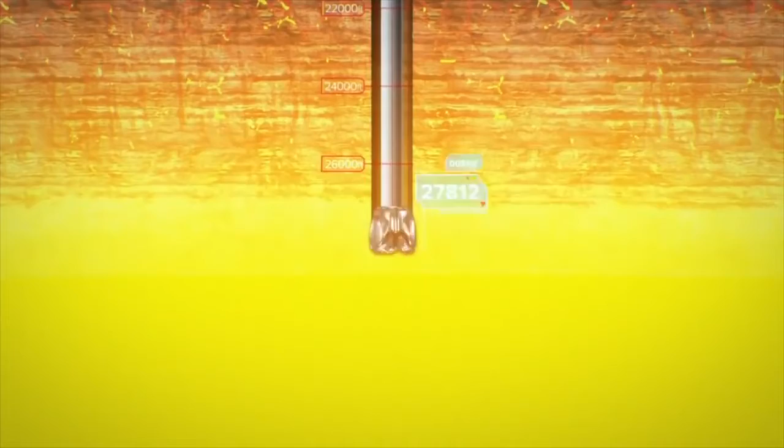So our first question was, where's the energy? And there's only one answer, and that's right here. A few miles underneath us is unlimited power, unlimited energy. The deeper you go, the hotter it gets. You take that energy and bring it up. Is there a way to bring up just the energy? What it takes is doing the right things and inventing the right things.

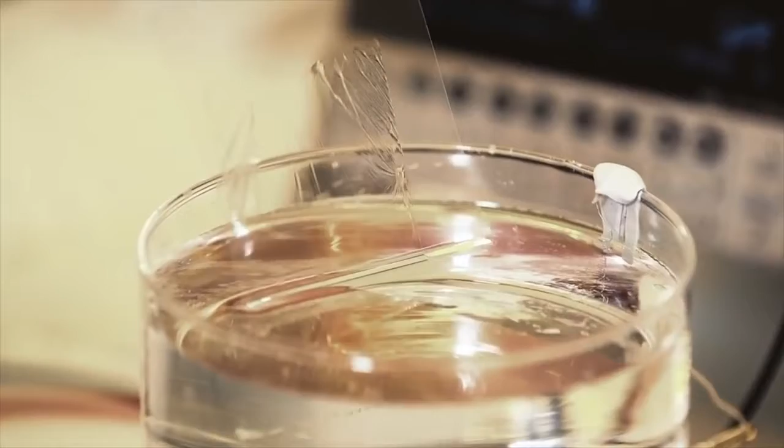You can't use copper wire because it'll melt. So we found this material called graphene. Graphene is a substance made out of graphite, which is like pencil lead. What they discovered was that if they take one molecule layer at a time off this graphite, that's called graphene.

It's 100 times better conductor than copper. It's lighter than air, stronger than steel. It transfers heat really efficiently. If you put 100 degrees here, you get 100 on the other side instantly. In the middle, it's completely cool. So the heat that you put in gets all the way there.

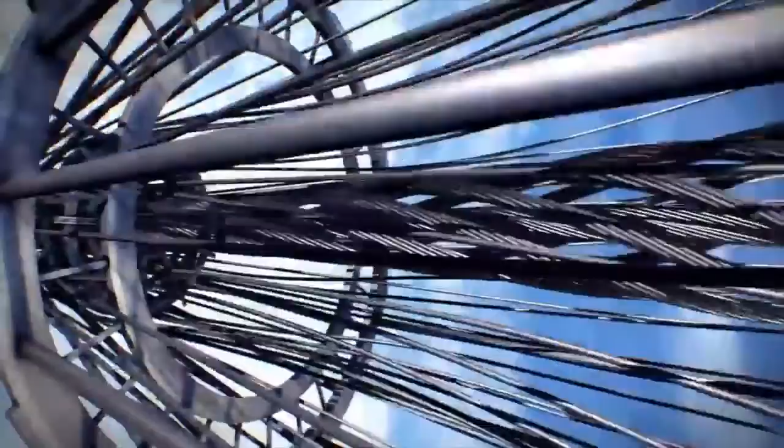Whether you go 10 feet or miles, you could bring up unlimited energy from deep underground to the surface, pollution-free. So I approached the graphene guys and said, could you make me a string? If you make me a string, I'll put those strings together and make a cable. Then I'll put the cable underneath the ground, and that cable will bring up the heat.

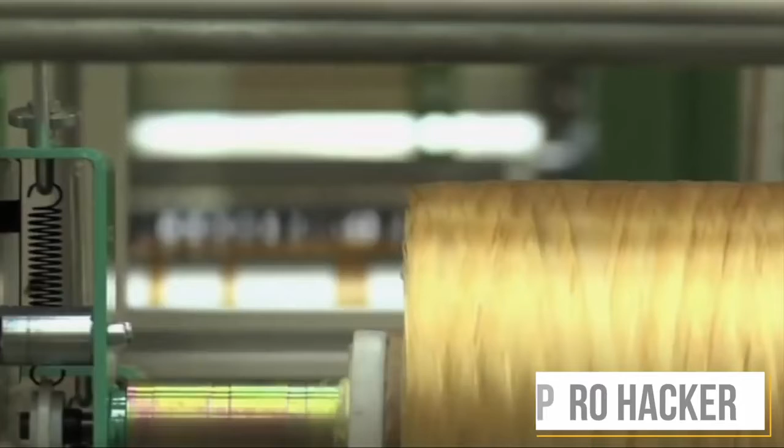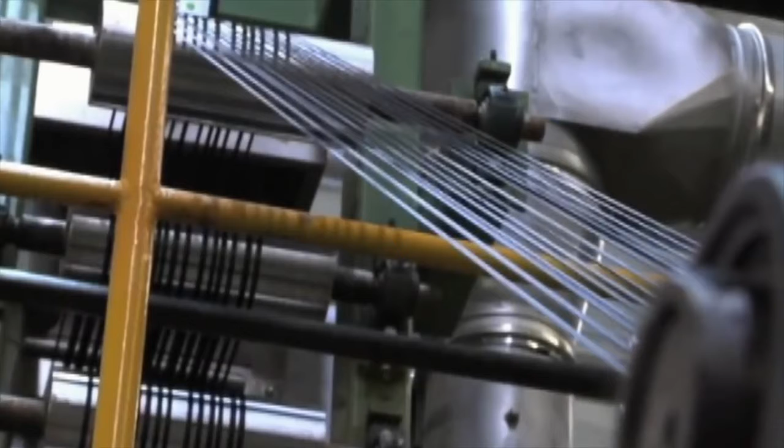At first they were a little wary because it seemed too simple. They have already made the first set of ropes for us, the short ones. They've tested it and found it to work perfectly fine. We are using that and working with Stage 2 in Michigan. Stage 2 has a platform we are building where we'll test everything out, and then that product will be commercially manufactured and propagated from Singapore.

This would be the greatest invention maybe ever, because if you can get unlimited energy from underneath the earth, pollution-free, that's everything. You have no pollution, no fossil fuel issues, no CO2 coming out, no greenhouse gases. All of that is gone. Here's the answer.

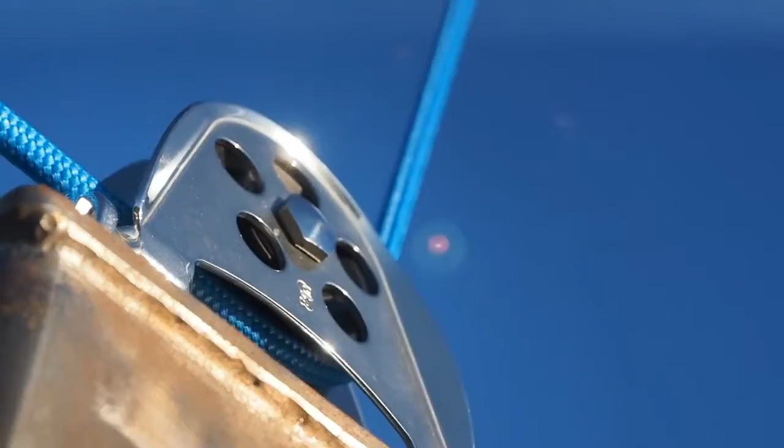The world demands cleaner, low-cost alternatives to fossil fuels. Altaeros Energies is answering that call with a high-altitude wind turbine, the BAT. For the first time, affordable wind energy can be delivered to the furthest points of the Earth, powering remote communities, off-grid industries, and disaster relief.

The Altaeros BAT harnesses stronger, more consistent winds found at higher altitudes. At these heights, it produces twice the energy of an ordinary wind turbine. The reason high-altitude wind is so exciting and worth going after is really very simple: there's just a lot more of it. Winds 1,000 to 2,000 feet above the ground are on average 5 to 8 times as powerful as what you get nearer to the ground.

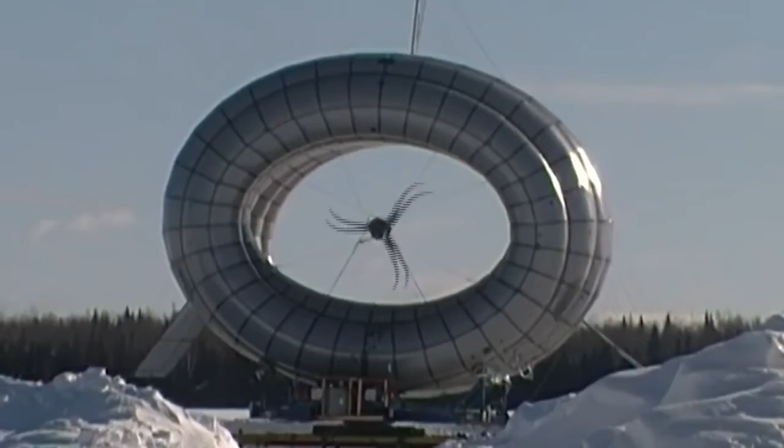Reimagining proven aerospace technology, the BAT uses an inflatable helium shell to lift a lightweight turbine into the air. Power is sent to the ground using high-strength conductive tethers. The BAT also offers a unique platform to expand internet and phone services, weather monitoring, and much more. Designed to be rapidly deployed anywhere, the BAT significantly reduces human and wildlife impact compared to ordinary wind turbines.

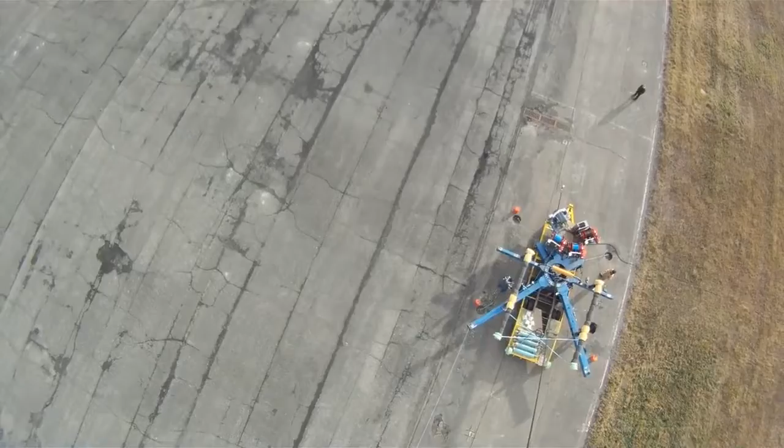I think Altaeros and the BAT is really exciting because it goes beyond the incremental improvements we've seen in wind, and offers a breakthrough way to bring wind power to millions of new customers around the world. Formed out of MIT, Altaeros is working with the Alaska Energy Authority to launch the first commercial high-altitude wind turbine. Less expensive, more flexible, and significantly more efficient, the BAT is the next generation of wind power.

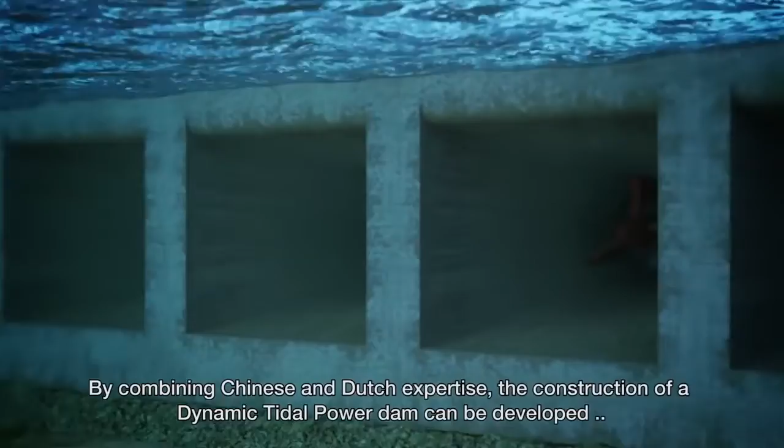In September 2012, representatives of the Chinese and Dutch governments signed an agreement to continue investing in the implementation of dynamic tidal power in China. By combining Chinese and Dutch expertise, the construction of a dynamic tidal power dam can be developed into an economically viable and environmentally sustainable investment.

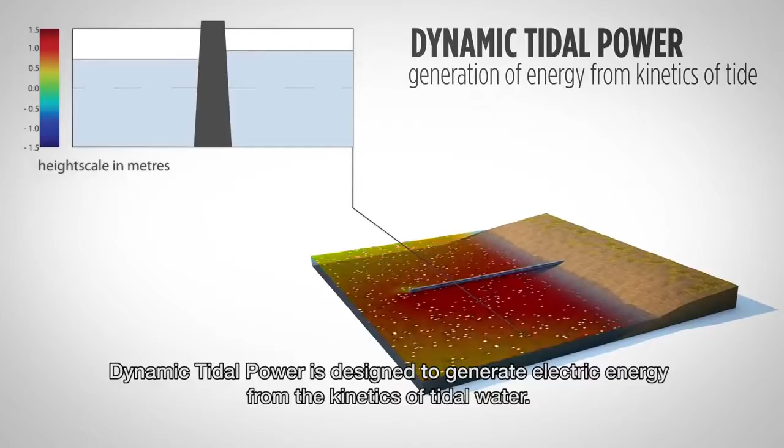Dynamic tidal power is designed to generate electric energy from the kinetics of tidal water. A long dam of at least 30 kilometers perpendicular to the coast interacts with the tidal flow to create a hydraulic head. A barrier parallel to the coastline at the far end of the dam, giving it a T-shape, amplifies the head on either side of the structure. This hydraulic head, together with the shape of the tunnels, results in the acceleration of water that drives the many turbines in the dam.

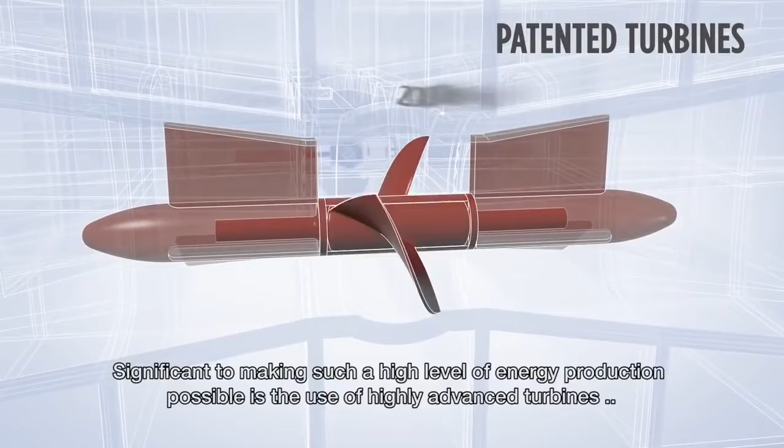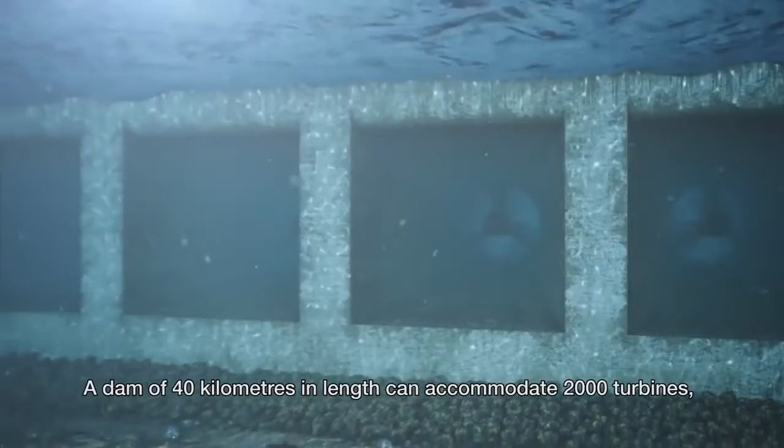Significant to making such a high level of energy production possible is the use of highly advanced turbines designed specifically for this purpose. They work with an extremely low head, are bidirectional, and have a peak output of 5 megawatts each. A dam of 40 kilometers in length can accommodate 2,000 turbines, enough to supply millions of households with sustainable energy.

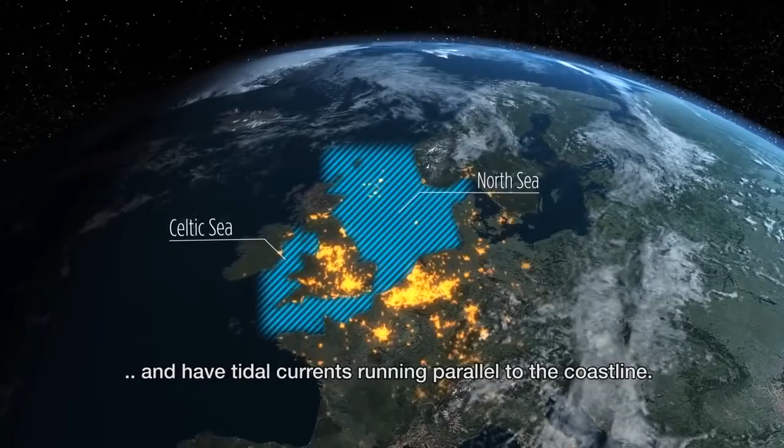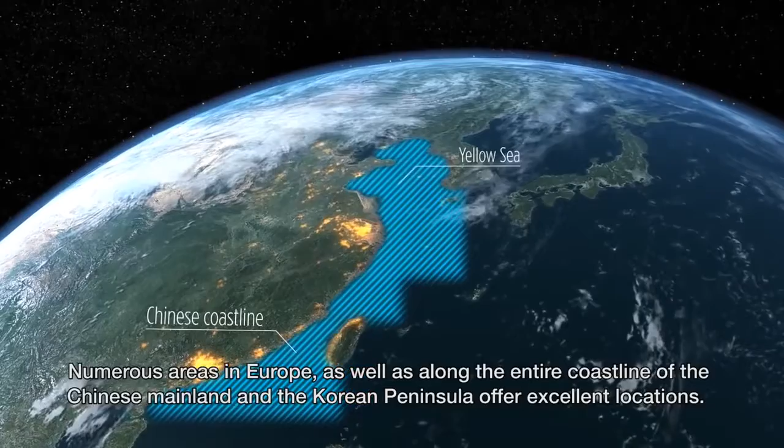Areas with good potential for the implementation of DTP are relatively shallow and have tidal currents running parallel to the coastline. Numerous areas in Europe, as well as along the entire coastline of the Chinese mainland and the Korean peninsula, offer excellent locations. With the latest knowledge and technology, China sets itself up to achieve its objective of generating more than 15% of its energy from renewable sources by the year 2020.

Dynamic tidal power in China: new tides for new generations.